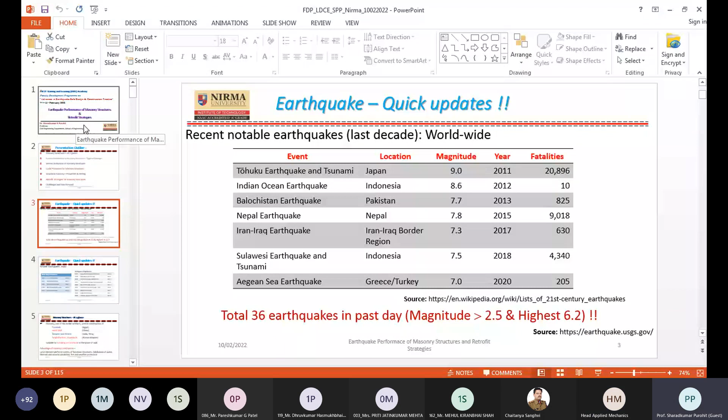Okay, press F on the keyboard, sir. Let's check whether it is without full screen mode. Also, is it changing the slide? Yes, it is changing now.

So it's going well as far as. Yes, yes, this will be fine. So if it's not in presentation mode, this will work. Okay, fine, but let me try for the last time in case. Should I start from the beginning with F5? Yes, let me try once.

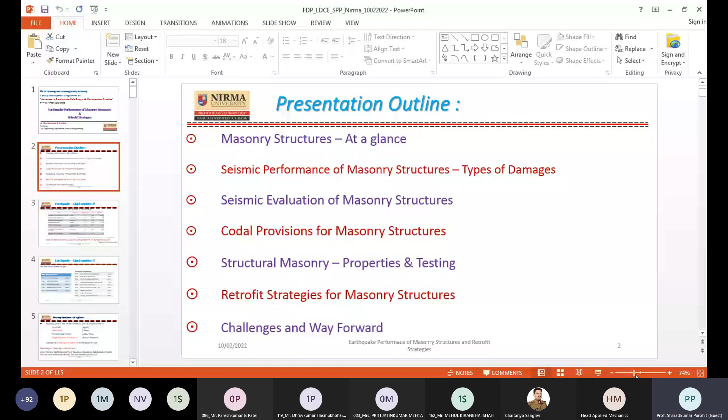Is it coming up in a full screen mode, sir? No. So I think better we go to that version only. Can I just keep it a little bit bigger? Yes, it is changing now. Let me collapse this. I think this looks pretty well. Yes, sir. Okay. I'm extremely sorry for the glitch, but I hope now the slides are moving. Yes, sir, fine. So I'm just reconnecting back. Sorry for that interruption.

So perhaps the discussion will follow in this chronological order, where we will discuss a little bit about the masonry, and then its performance during past earthquakes, then the various ways of seismic evaluation as far as masonry structures are concerned, followed by some of the codal stipulations that provide a certain amount of safety against the earthquake as a force.

And then we will cover some properties and testing required to be done for a masonry unit or masonry as a whole, as a part of one of the case studies carried out in our own department. And then some of the retrofit strategies commonly employed in our own country and worldwide, and some of the challenges and way forward.

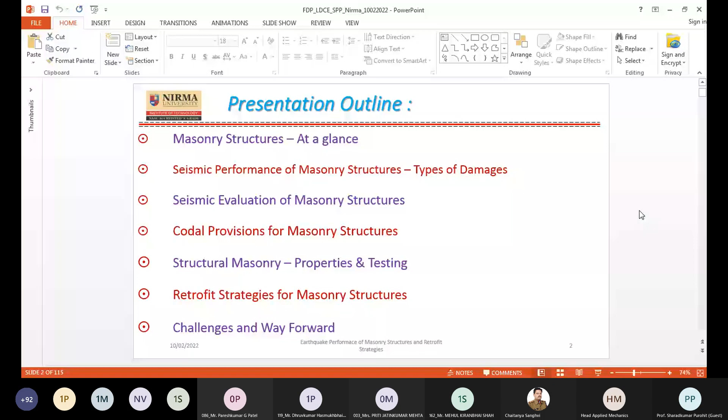Now things are going well, sir. Yes. Okay, fine.

Thank you, sir. So these are some of the notable earthquakes that I was discussing a while before. These are worldwide earthquakes that happened in the last decade, and a couple of them are more notable to us: the Nepal earthquake of 2015 and the earthquake on the Iran-Iraq border region. And the Balochistan earthquake was also of significance, despite the fatalities. It has given us a lot of lessons to learn.

And if we look at day-to-day activity, every day there are a huge number of earthquakes appearing on our Mother Earth. Yesterday there were 36 earthquakes, magnitude ranging between 2.5 to 6.2.

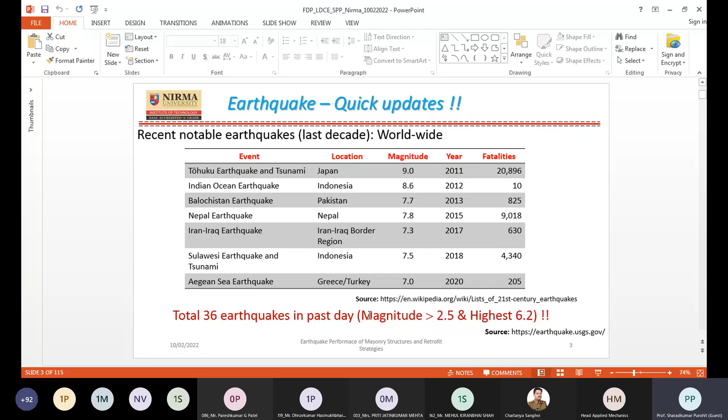Coming back to the domain specific discussion, masonry is one of the early civilization artifacts, used in the construction of stone based pyramids and the Great Wall of China. And in India and Peru, some very well-known temples and palaces were built mostly in stone masonry, and later with brick units along with lime mortar.

And in the Roman empire, amphitheaters, aqueducts and colosseums were built in stone or later with brick or other masonry units. These were possible to construct because such elements are very well suited to handling vertical loads, which are always in the plane of the wall. But for any load out of the plane, they become the most vulnerable element.

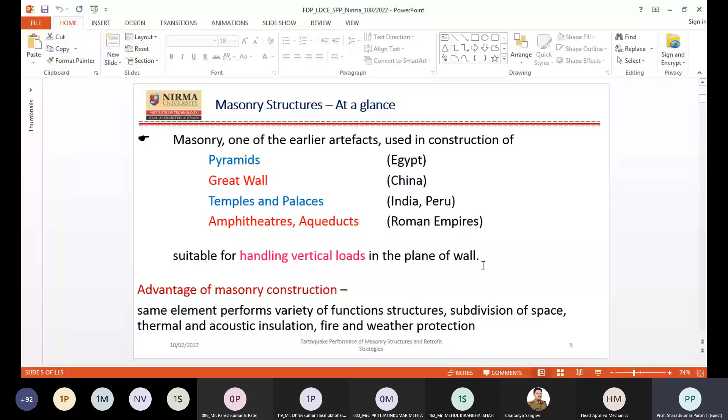But one of the major advantages of masonry is that the same element performs different functions in the same structure. It acts as a structural element, it serves functional requirements, and it gives serviceability in terms of fire, thermal and acoustic insulation, and weather protection. Perhaps that was the reason masonry was considered one of the very important elements for civil habitation in old times.

In fact, if you look at the masonry, we know the masonry is basically nothing but the assembly of the various structural units which are bonded together in a particular pattern by either mortar or grout. And there are different types of mortar and grout that we have been using, right from mud mortar to recent days cement, and now specialized grouts are also available to join the different masonry units.

But this masonry, when used in a different form, can be considered as unreinforced masonry, or when we try to give more strength to such units by placing reinforcement in the corners or at a certain interval along the length of the wall, they become converted into reinforced masonry. And certain parts of the world have also been employing pre-stressed masonry. Of course, it is not very common in our part of the country, but some western countries or some countries in European territory have been using pre-stressed masonry as well.

As we know, masonry structures are very well designed for withstanding compressive load, and they are able to do that because of the weight of the structure itself, and that's how we call them load bearing. This load bearing structure forms a very good transfer mechanism for load from horizontal to vertical direction, and they have been mostly appropriately used for buildings. And since they are stable, take load, and have a good load transfer mechanism, they have become a common building typology in rural India as well as semi-urban areas.

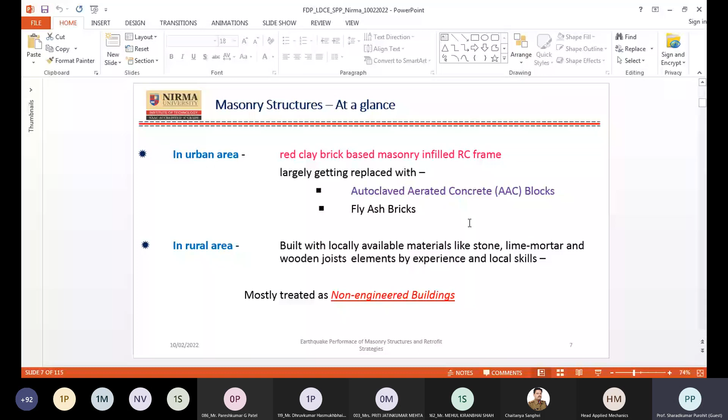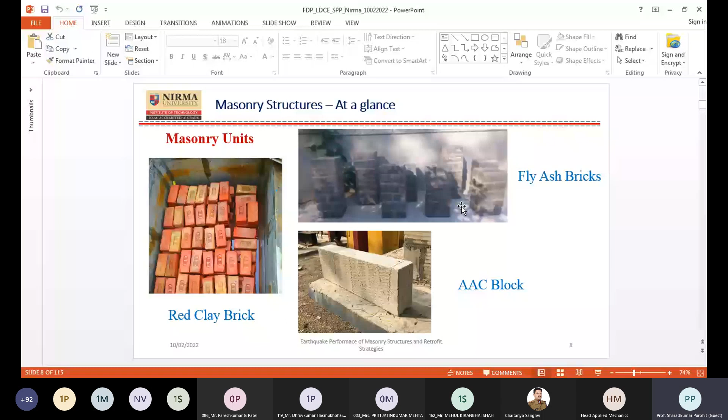Some of the masonry units that we are very much using right now include red clay brick, fly ash brick, as well as AAC blocks, which are now very widely used, and fly ash bricks are also slowly and gradually replacing red clay brick. In some other countries, different forms of masonry units are also used, like concrete blocks. Of course, this is not very common in India.

We still don't build with concrete blocks. We either use red clay brick or maybe fly ash and AAC up to a certain extent. But in other parts of the world, they have also been using hollow concrete blocks with 2 cells or multi cells, like 3 cells or even more than that. So they have been developing masonry units of different forms.

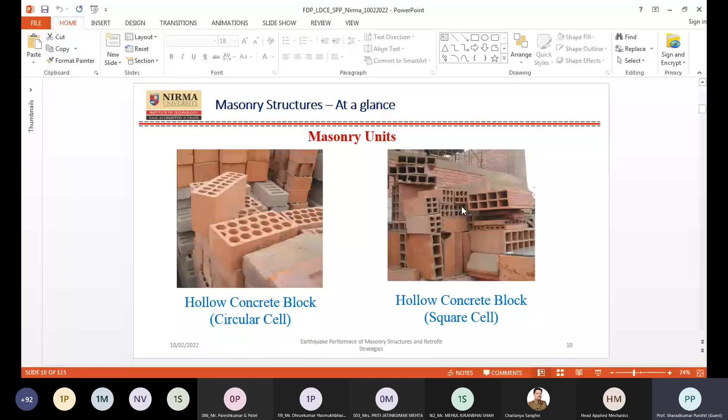There are multi-cell units also available, as you will be able to see in the next slide. There are circular cell based hollow concrete blocks, or square cell hollow concrete blocks. In some countries like Canada or New Zealand, or somewhere in the European region, you will find practices of masonry building, maybe not purely unreinforced, but with such cells where you put a reinforcing bar. So these are the various structural units or masonry units that have been used.

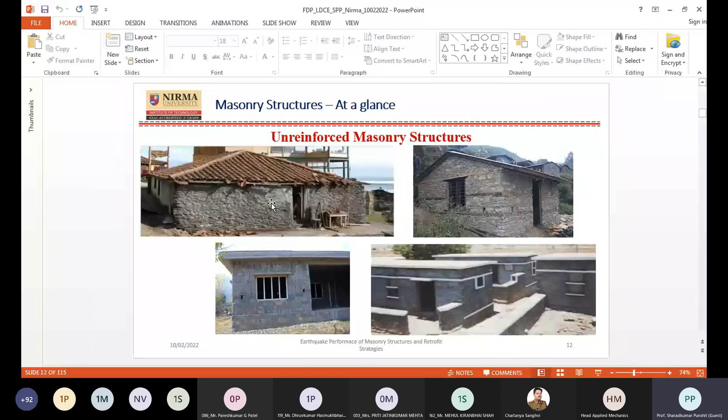You will also find a variety of stone based masonry work here. Some of them are very nicely placed, as you can see on the right hand side of the screen. But this top portion, you will see, is perhaps not very nicely built, but they have been very much part of our common human habitat.

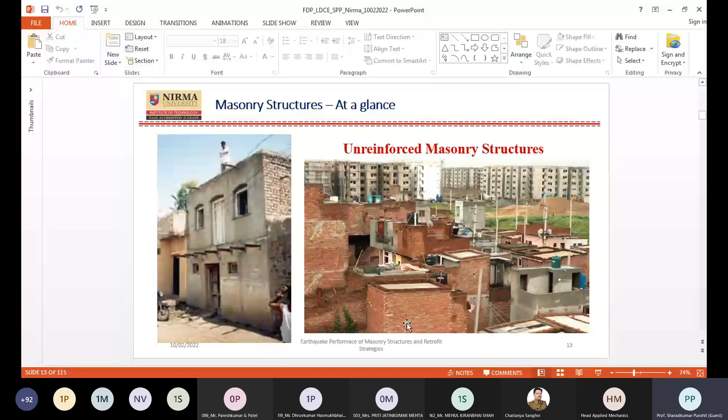But these are very haphazardly done, and somewhere you can see very long vertical red clay brick walls that have been built, and people have been living in them. Here also you will find some haphazardly built red clay brick based buildings, and somewhere you will also find the use of two different types of masonry.

I'm not sure whether you are able to see the cursor, because I cannot use my laser pointer now, but are you able to see the cursor moving? Can someone help me? Yes, sir. It is visible.

Okay, thank you. So you will find that depending upon availability and maybe some other factors, people have even started using a mix of masonry units. Perhaps it is not a very good practice, but you will find them, and different arrangements, in very simple unreinforced masonry structures in different parts of India.

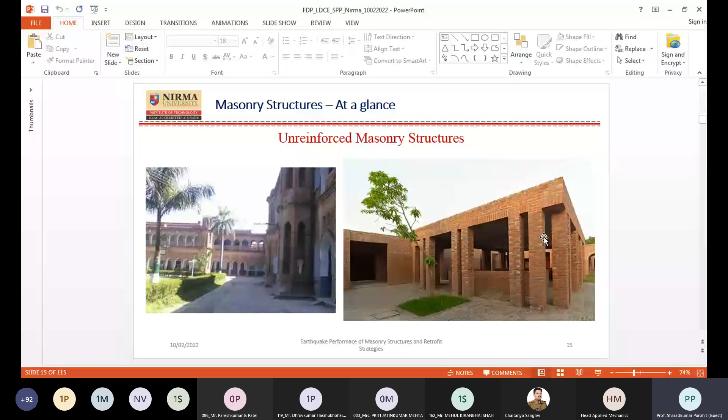Typically, for most of our reinforced concrete structures, we build the RC frame first, and later on it is infilled by masonry. But in confined masonry, the process is a little bit reversed. It means you build both of them simultaneously. So you build the masonry structure up to the height required, and along with that, you also have reinforcement going on at a regular interval. And then you cast the reinforced element a little bit later, once you have the

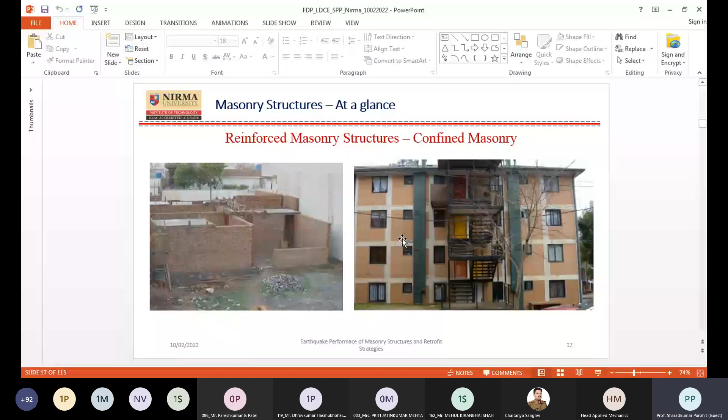Otherwise, if we look at our own philosophy of masonry structure, we typically do not have many examples where we have built masonry structures of more than 2 stories without any reinforcement. So unreinforced masonry structures are mostly limited to 2 stories, but with confined masonry, one can go up to 4 or 5 story construction. And a recent example near the city of Ahmedabad is the IIT Gandhinagar campus, which has come out of confined masonry construction, at least the hostels and some of the faculty residence buildings.

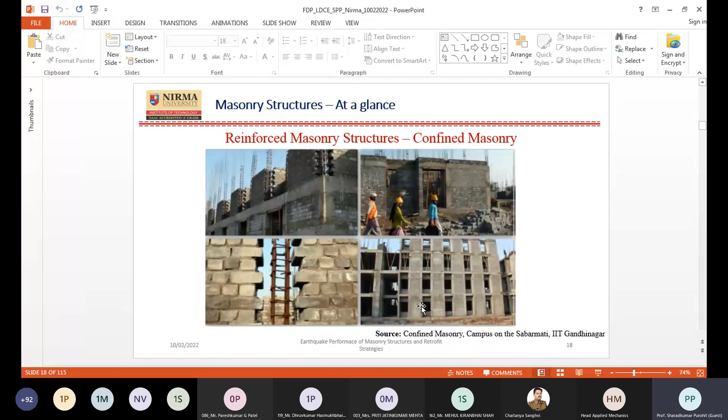Here you can see that the brick wall has already been taken up, and the IIT campus, being a green campus and GRIHA rated sustainable campus, used fly ash instead of red clay brick. In order to utilize this waste, they prepared fly ash bricks at the site and used them as the masonry unit, building in between the columns with a toothed connection to give confinement to the wall. And you can very well see 3 or 4 story buildings coming up with confined masonry. These are some of the recent practices, alongside the unreinforced masonry structures that have been built or that we still continue building.

But if we try to understand from an engineering perspective, masonry structures are typically passive structures, and therefore they heavily depend on their mass and stiffness properties. They are very good against in-plane loading, as we have just discussed, but their out-of-plane behavior is very weak, and therefore they are vulnerable to lateral load applied out of plane to certain walls. It becomes in-plane loading for certain walls, but for other walls it becomes out-of-plane loading, and that is where it becomes vulnerable.

And because of their vulnerability, in past earthquakes we have experienced worldwide, masonry structures have become vulnerable, and they have undergone damage of varied degrees, ranging from partial damage to complete collapse. If a particular structure is not very well built and does not have enough earthquake-resistant features, then it is likely to undergo complete failure. That we'll see in some of the photographs a little bit later.

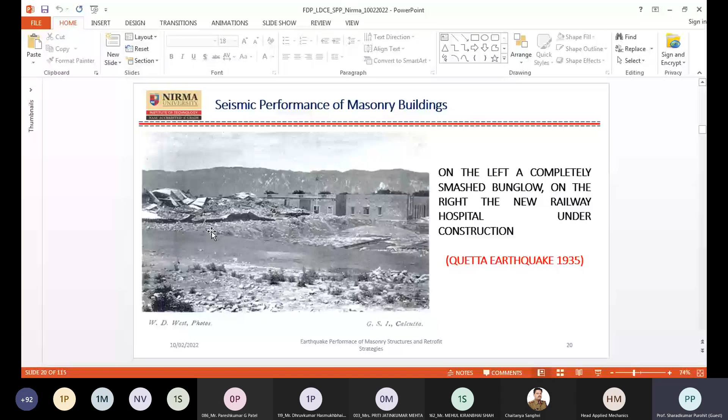But some of the structures do not undergo complete damage or completely collapse, but they show damage of varied degrees or different forms due to the mass and stiffness attributes of masonry structures. So I have tried to list some of them here in a chronological order and classification, so one can understand that most masonry structures are found to be very weak against out-of-plane bending.

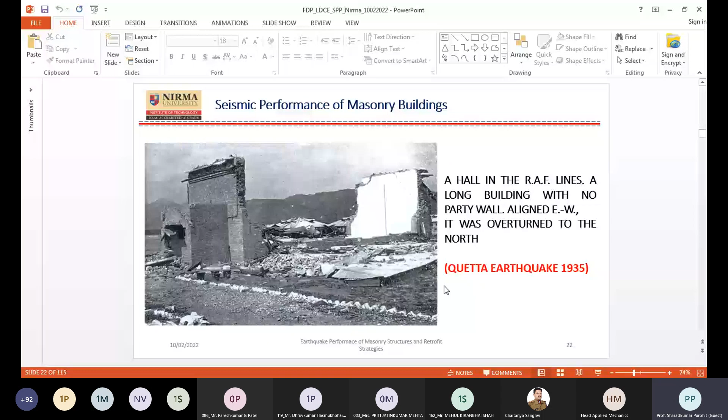A similar kind of failure you will also see in a Chile earthquake, where this long standing wall has some partial stiffening. As you can see, there are regular stiffeners in the wall, but still the in-between piers have a huge aspect ratio, and therefore it makes a perfect case of a long pier subjected to lateral load, likely to undergo out-of-plane bending, and one can see a tensile failure appearing in this particular wall. This is a very good example of an out-of-plane wall failure.

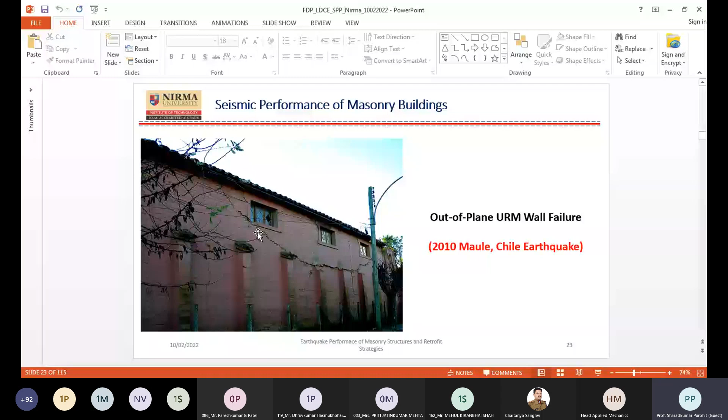We see similar experiences from the 2001 Bhuj earthquake, wherein sometimes not only the out-of-plane failure of a long wall but even a short wall may go away from the corner, because of the weak connections of the cross wall, it has completely gone from the corner of the building.

Because that corner has gone off, despite this stone structure having a continuous lintel, as you can see from the arrows I am moving, perhaps some engineers had already realized there was a requirement of a continuous lintel, but that lintel has also collapsed because the corner wall collapsed. This was a typical corner failure seen in the Bhuj earthquake and some older earthquakes as well.

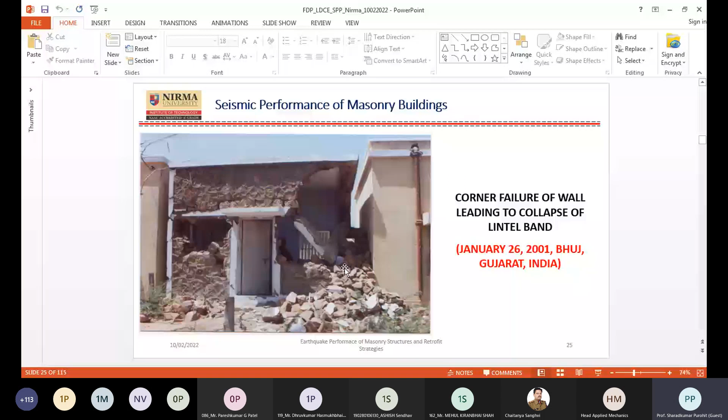Again, when the component of the earthquake gets transferred in the in-plane direction of any wall, you will find that because of the aspect ratio, some of the piers typically undergo shear deformation. For a certain aspect ratio, shear deformation becomes very predominant.

We are all well aware that any freestanding wall subjected to lateral load typically undergoes both bending deformation and shear deformation. We have found that if the aspect ratio is less than half, shear deformation becomes very predominant, and that leads to a diagonal kind of failure in a building.

Some similar pictures or similar behavior were also seen in the Bhuj 2001 earthquake, where a shallow wall with regular openings underwent first shear failure, and later you can see it completely collapsed because of the very low strength of that particular wall.

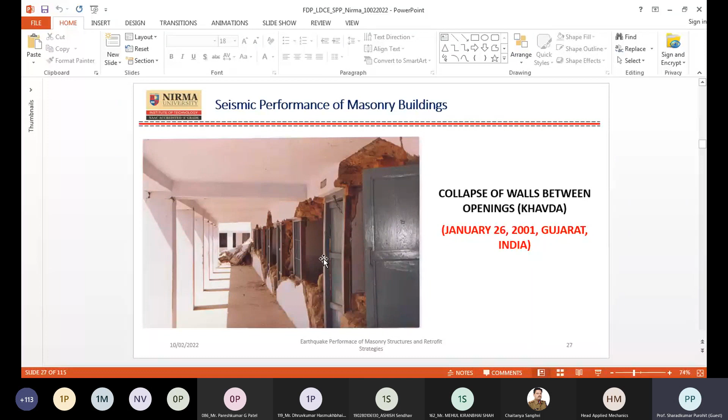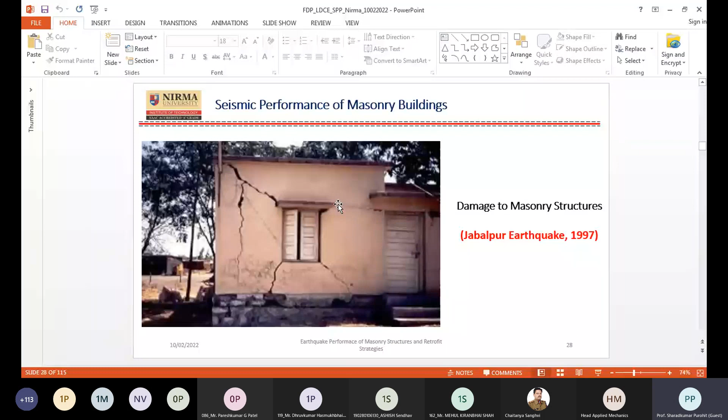Such scenes were very common during the 2001 Bhuj earthquake, and before that in the Jabalpur earthquake too, we found that despite having a good aspect ratio of the wall, close to the opening there would be diagonal cracks at the top and bottom of the opening because of shear. Such a sight is very common.

When this aspect ratio becomes a little higher compared to the previous one, as seen here, there is a larger aspect ratio, with some beam going on, and some height or distance available in the building. This acts like a fixed end connection for a frame with a larger aspect ratio.

Here you can see complete wall flexure happening, where tension appears on the bottom side of the wall, and because of that some masonry or plaster work has already gone, with cracks running right from the tension to the compression zone.

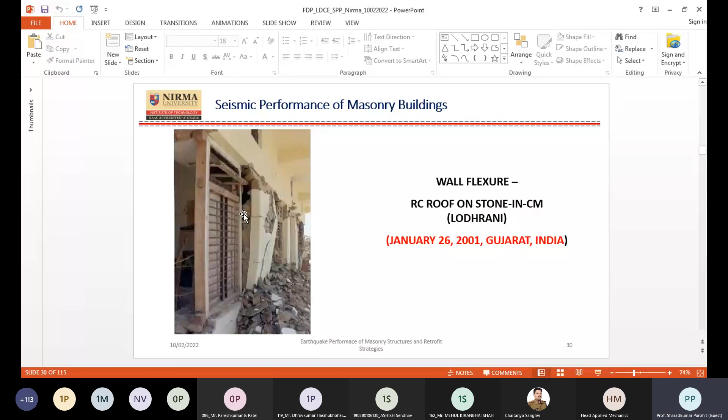So it is very typical of a flexural failure, even in the case of reinforced concrete flexural elements. You can see that the tensile cracks grow from the tension side and penetrate fully up to the compression zone.

If you look at all the damage in one go, as summarized in the book of Tomazevic, you will find that all those piers under an earthquake, when subjected to in-plane loading, will undergo a shear failure, as you can see.

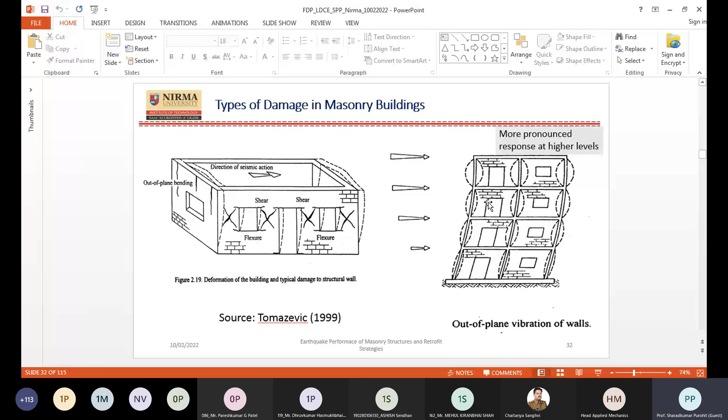So any multi-degree of freedom system with a lower mode of vibration always shows higher participation from the top stories, or the top couple of stories, depending upon the mode. This is what people have already summarized, and based on some studies we have done, we have summarized some of the damage patterns typically observed during an earthquake.

So they are typically an out of plane collapse of exterior wall or any interior wall as well, failure of the wall corners, and cracks at the wall intersection. That can be another common type of damage pattern that we see.

There can be diagonal cracks in the structural walls, predominantly when the in-plane wall is undergoing shear failure. Then you will find diagonal cracks in the wall, or when the aspect ratio is a little higher, because of the lateral loading the wall can undergo wall flexure, and they will also lead to cracks in the spandrel beams and or parapets available towards the exterior wall.

And there can be partial disintegration or collapse of the structural wall, and last but not least, either partial or complete collapse of the building. So these are some of the sites, observations, and past earthquake learnings that we have tried to summarize.

Most of the time, irrespective of various events that have happened over a period of time or over an interval of time, the masonry structures will more or less behave, or they will be subjected to failure, in any one of the ways listed over here.

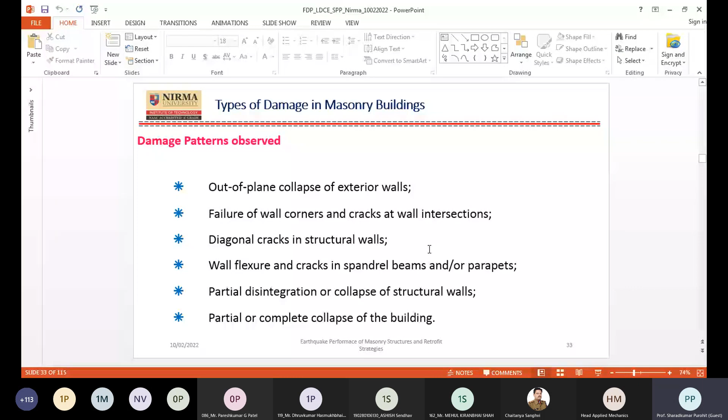Nowadays there is a recent practice, as we find out somewhere, that certain buildings put up precautionary measures, or put some wall stamping, and write something like this, as some of the buildings in California and some of the URM buildings in Portland have already been mentioned: it is an earthquake warning. This is an unreinforced masonry building. You may not be safe inside or near an unreinforced masonry building during an earthquake.

Perhaps this may be a little bit of a new addition into the practices when you build a URM. But that also gives the idea that people still do not want to discontinue making and constructing URM buildings. So there has been some affection, some utilization of the URM, but now they are also putting an earthquake warning, as some of the examples I have shown here.

So these are some of the experiences that we built, and when we start looking at some of the damages, perhaps we try to understand that, and we try to build some engineering about it, and that allows us to now typically take up a seismic assessment or seismic evaluation of the masonry building.

So typically, the seismic evaluation is nothing but understanding how that building behaved, what was the attribute of the building, what was the load transfer mechanism, what kind of damages it has undergone, and based on that, we try to figure out whether this building has lost its integrity to a varied degree of levels.

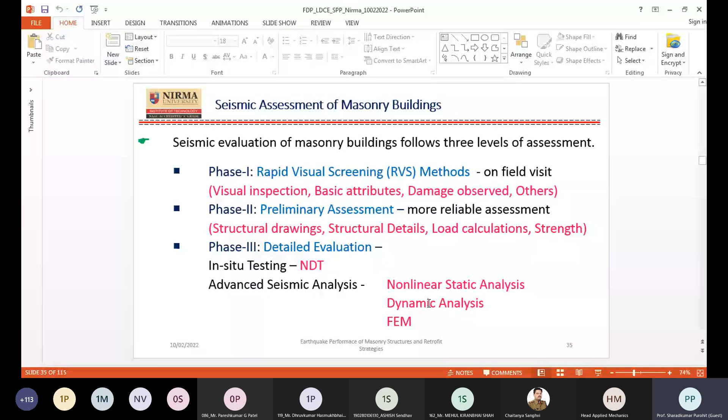And as I said, when it comes to a detailed evaluation, mostly we do it in a two-way, and out of this in situ testing is playing a very important part. And perhaps as a country, we might not be still capable enough to conduct this kind of testing, or because of the limited skill set available, or because of the limited people involved in such kind of thing, there is always a dearth of input properties or input data as far as this detailed evaluation is concerned. And of course, we have been struggling all the way, right from employing the right kind of entity, getting the required input data, and then carrying out the detailed evaluation in terms of the analysis.

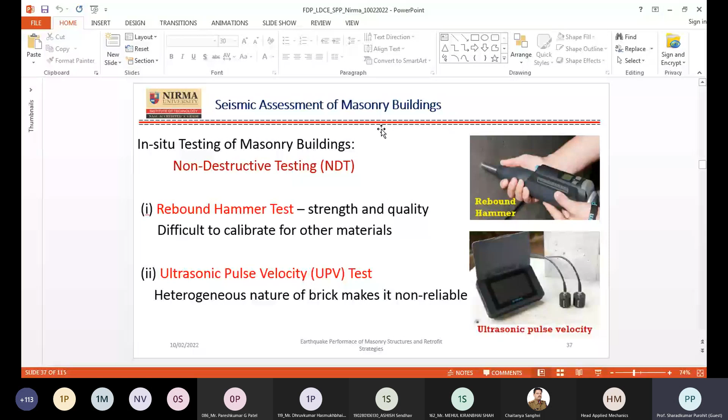And now people are also doing radiography to detect the reinforcing steel or bed joint reinforcing steel, whether they are in the wall or not, masonry ties or anchors, pipes, conduits, anything that we want to figure out. Of course, this set of instruments is a little bit costly, but they have been developed by some of the developed countries, and they are available. Costly, but somehow they are available.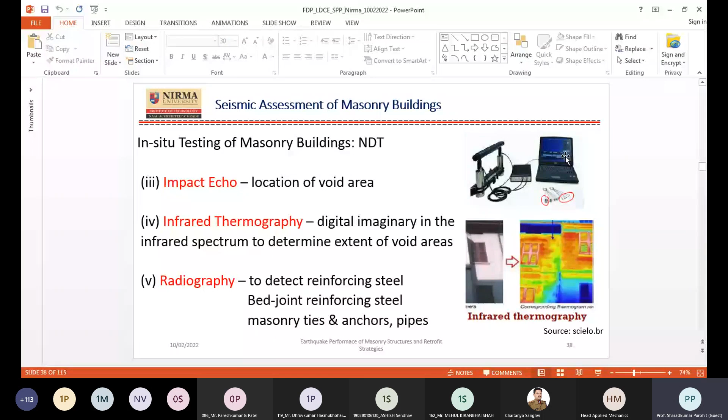But the most common type of test is not part of non-destructive testing for masonry structures. Over a period of time, people have realized that carrying out NDT for masonry structures is not a very viable solution, or not feasible all the time, and therefore some semi-destructive testing is required. One of them is called the flat jack test, following ASTM C1196, and this is typically used to calculate the in situ compressive strength and the stiffness of the masonry, where you have to open a bed joint at two different levels and place the flat jack.

They are available in different shapes, either rectangular or semicircular, to adjust to different forms of masonry. You need to open out a bed joint, insert it, and then pressurize it to give the prescribed load, and in between these two you place your LVDTs or mechanical dial gauges, both in vertical and horizontal directions, to figure out the strain produced in that particular element. You can develop a stress-strain relationship, calculate at what load what strain is happening, and also calculate the compressive strength of the existing structure. So this is a very well established, very common test, and there are certain organizations in India who have been doing such testing very regularly.

Just to share with you, one is CSIR SERC, and another one is the CSIR lab at Roorkee, which is CBRI. Both of them have such facilities available, and they have been doing such flat jack tests. Of course, they may not be within reach of stakeholders in other parts of the country, but at least some organizations have it. Some of the IITs also have such testing facilities available, typically IIT Kanpur, IIT Guwahati nowadays, and IIT Madras.

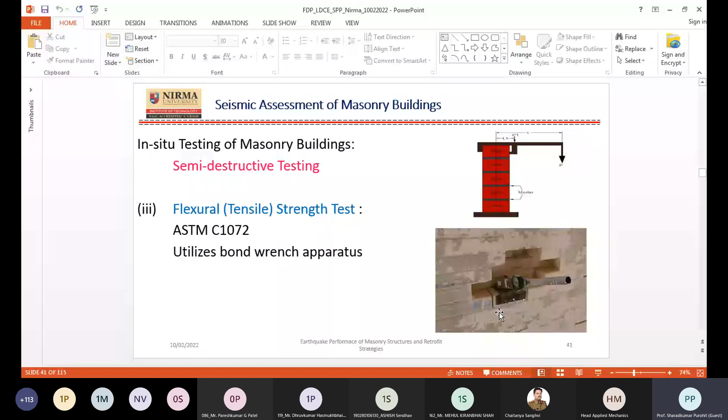Of course, I have avoided the advanced seismic analysis as part of detailed evaluation, because most of you might be well aware of it once we have input from such basic tests: the shear strength, the compressive strength of the masonry, and the third very important parameter, which is always difficult to get and varies hugely across various parts of our country, the modulus of elasticity.

So establishing the modulus of elasticity and its relation with the modulus of rigidity is, of course, sometimes a challenge, as we have learned from our own experience when we try to get it in our own laboratory. We find some of the challenges, but as you are very well aware, the modulus of rigidity is around 30 to 40% of the modulus of elasticity. But getting that also is very important.

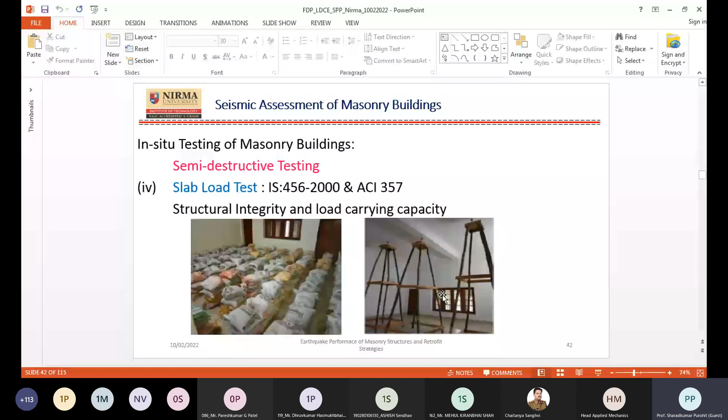I have intentionally avoided some of the mathematical equations, so that we can convey the basic fundamental understanding about this masonry structure. But anyway, once we know these basic properties, the mathematics can be very well developed. There are very good references available in terms of books and literature which talk about how to use that mathematically. But these are some of the basic pieces of information and some important experimental testing, either at in situ level or at laboratory level, that we have to carry out.

And once we are done with this, at least we can try to better understand the seismic response of the masonry structure. As we are very well aware, any masonry structure has typical components in terms of the roof, walls and the foundation, and the loads coming in vertical and horizontal directions are transferred from roof to the wall and wall to the foundation. Therefore, under a horizontal force, certain walls will act under in-plane loading, and some of the walls will be subjected to out-of-plane loading.

And the major problem we face in masonry structures is that they have a very good in-plane loading capacity, but they are very weak in the perpendicular direction of the wall. When earthquake or lateral force is applied perpendicular to the plane of the wall, it is likely to undergo overtoppling. If it is a freely standing wall, it is obviously undergoing toppling. But if it has different boundary conditions, like fixity at both top and bottom, it will undergo bending or flexure, and because of the weak tensile strength, it will immediately break into two pieces in the out-of-plane direction.

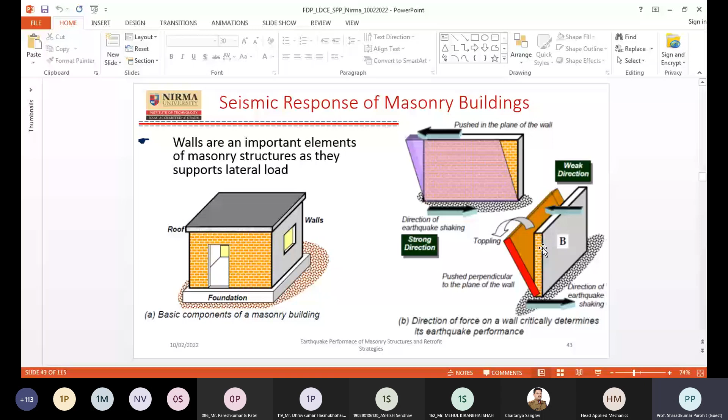And if we talk about any masonry building, and take different walls like A and B, if they are not very well connected by cross walls, then in the event of an earthquake, the walls perpendicular to the earthquake loading will likely overtopple. Therefore, in order to get better resistance from any masonry building, we have to have a box type of action, or a unified action, in terms of the cross wall supporting the perpendicular wall. So we have to ensure, in whatever masonry structure, that if your cross wall is supporting this perpendicular wall nicely, their behavior may be much better.

And of course, we have seen in some pictures in the earlier part of the presentation that even if you have a cross wall, but there is no proper connection between these walls, then the wall perpendicular to the direction of the lateral load will either overtopple or overturn from its place. Therefore we must have very good bonding between both perpendicular walls whenever there is an earthquake. And of course the aspect ratio also plays a very important role.

So even if we have a cross wall available, if we have a very long wall, then despite the good support from the cross wall, it is likely to undergo bending. So we have to make sure that masonry structures have a better aspect ratio. And as we can see, for a short wall, the cross wall is very well supporting the wall which has a lesser aspect ratio.

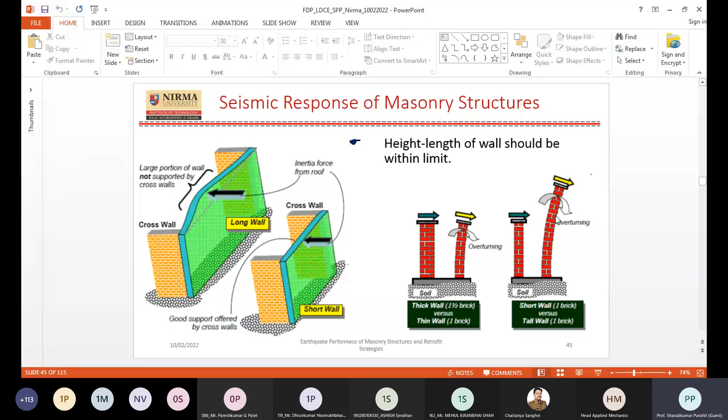And why we are talking about this a lot: typically we found by our own experience, and as reported by many other technical references, that most of the time the fundamental period of the masonry structure is around 0.3 second or even less for low to medium rise buildings, because of the presence of many structural walls. And because of these many structural walls, the structure becomes stiff, and a stiff structure always attracts larger acceleration, and because of this larger acceleration it is likely to undergo more damage.

And therefore, because the time period of such masonry structures is very low and it becomes almost an acceleration sensitive structure, you will find even a moderate earthquake can cause a lot of damage to the masonry structure. And therefore masonry structures become a little bit vulnerable against different varieties of earthquakes. As you are well aware, a large earthquake has a huge frequency content, and therefore it will likely affect the vast majority of structural typologies.

But even a moderate earthquake can cause a failure or damage to the masonry structure, because low to medium rise buildings are always considered stiff structures. And therefore, in order to avoid such failure in a moderate earthquake, or even a very frequent earthquake with lower magnitude, we have to have our masonry structures very well built with certain earthquake resistant features.

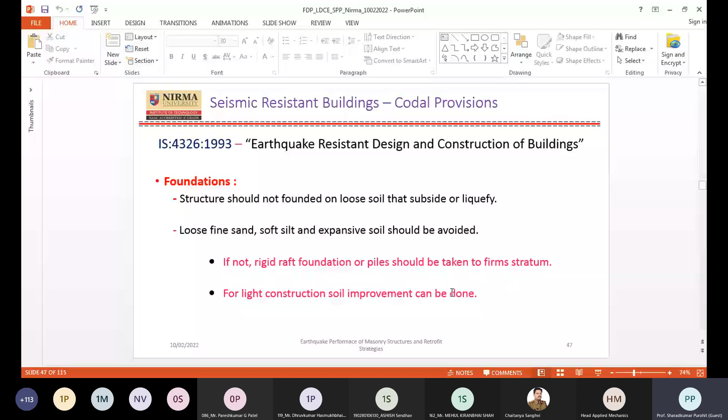Otherwise, there will be failure of the structure as a whole, and therefore most of the time we make sure that the foundation is not founded on loose soil which can subside or liquefy. And therefore we have a lot of ground improvement techniques, and there is geotechnical earthquake engineering that takes care of such things. But as far as structural engineering is concerned, we need to ensure the separation of adjoining structures.

So we have to categorize our building depending upon the importance factor as defined by IS 4326. For different seismic zones, we have different categories of building, and different requirements have been placed to make sure there is enough separation for adjoining structures. So here we need to realize that structures with different total height or story height and different dynamic characteristics need to be separated, and this is done to save our structures from the pounding effect, because two dynamically different structures are likely to undergo different modes of vibration.

You are well aware from the concept of dynamics that different dynamic characteristics under the same frequency are likely to excite different vibration modes. When you draw the mode shape of a particular building, you may find that one building is vibrating in the first or second mode while another is vibrating in a higher mode, and there may be a collision between these two structures.

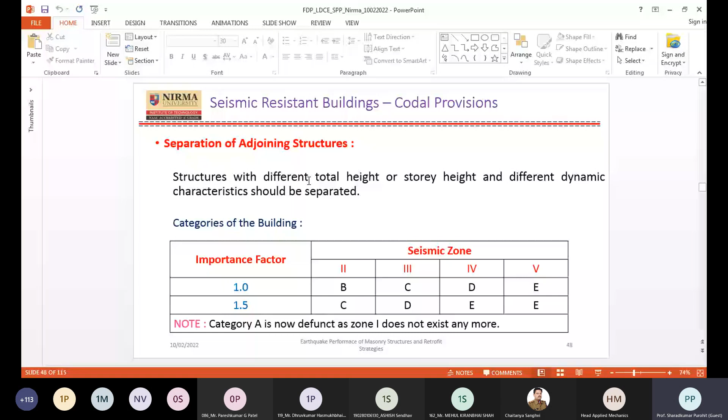Therefore we need to have some separation of the adjoining structures, because unreinforced masonry structures are typically constructed in our country very haphazardly, and therefore this particular provision makes a lot of sense.

As far as ensuring good cross wall connections, IS 4326 talks about a toothed joint. Of course there are some difficulties observed during construction of such a joint. In fact, feedback received during confined masonry construction shows that this toothed joint is really a little difficult to maintain quality for, as far as construction is concerned, but it is a very important element to stitch the walls together.

Therefore we need to provide some kind of alternate toothed connection as detailed in IS 4326 for different cross walls. You can see that whenever two end walls are meeting, there is a different kind of toothed connection, and when an internal wall meets a long wall, there is a different kind of connection. So there is different detailing given for masonry walls in IS 4326.

Apart from that, there are certain restrictions on providing openings so that enough piers with good shear resistance can be formed. IS 4326 has given certain dimensions or restrictions on openings for masonry structures, outlined in table number 4 with notations given on the left side of the figure, ensuring that the wall has enough piers available between openings.

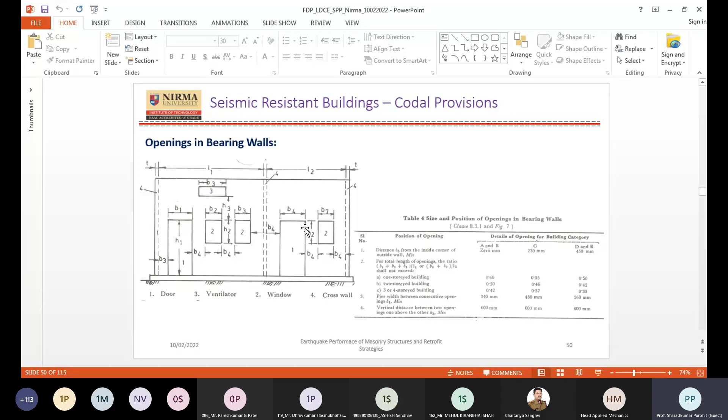This is very difficult to do. I myself do not have confidence in doing this even if I had to practice it, because this is a very small toothed connection adjoining to the opening.

Instead, many other country codes allow you to put reinforcement on all four sides of the opening to make sure there will be no shear cracks propagating from the sharp corners of the opening. IS 4326 still advocates some toothed connection to be used along with corner reinforcement, but it is a little difficult to practice in the real field.

But this is what the stipulations or features that IS 4326 has given. Apart from that, there is a requirement of seismic strengthening arrangements for category D and E buildings. Mostly D and E type buildings are located in highly seismic regions and are mostly non-engineered buildings, so there have to be certain features that are mandatory as far as IS 4326 is concerned.

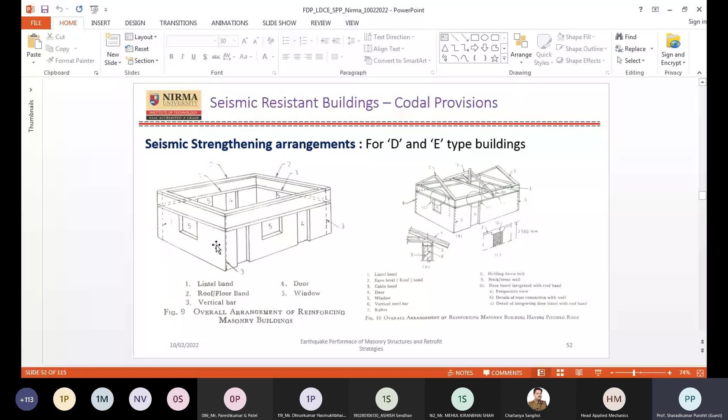But the RC band details are also provided here. I'm not going into much detail of all those categories of the building and what kind of the requirement, I think we can very well understand from it.

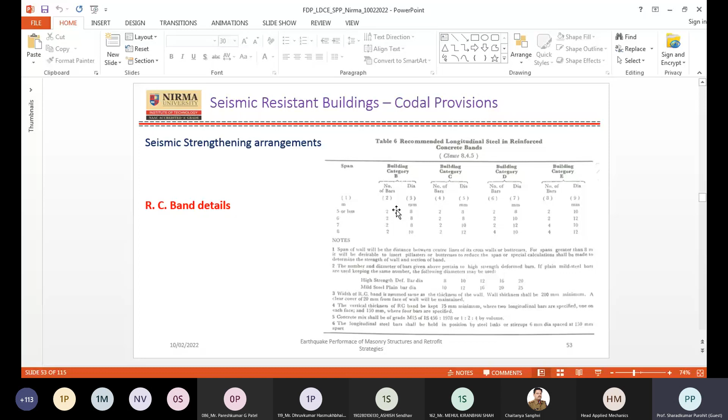But different kinds of geometry and cross-sectional walls have different kinds of detailing as far as RC bands are concerned.

So these are some of the corner reinforcements that we have to practice in order to save the corner crushing of the walls or opening of the walls, as mentioned here.

And some kind of lateral ties that we have to use with a different depth of this band. There may be a 75 band or 150 band. They have different detailings that are also given in IS 4326.

Typically nowadays, at least to share with you, I have seen some of the good practices where people are doing such kinds of things when they build a masonry structure, which is a good part of it.

But the most important yet not very well used feature of IS 4326 is vertical reinforcement detail. IS 4326 of 1993 has also outlined the use of vertical reinforcement, maybe because some other countries have a common practice of using this, since they use hollow concrete blocks.

But in our own part of the country, we never use such kind of hollow block, and therefore we do not use vertical reinforcement.

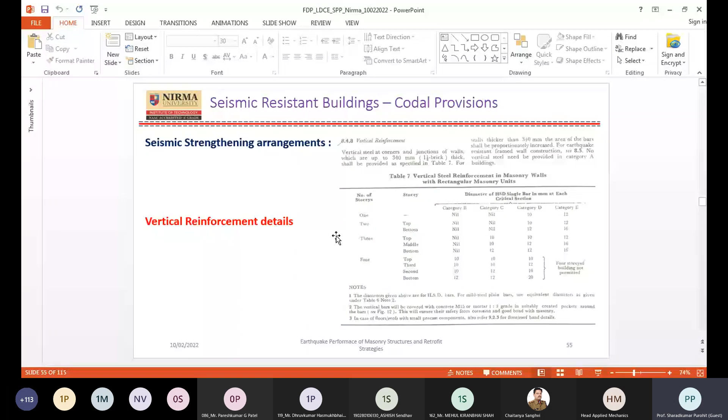But IS 4326 has outlined the use of vertical reinforcement, and this vertical reinforcement for different thicknesses of the brick walls needs to be placed in a vertical direction with a pocket, and that needs to be grouted with a cement based mortar grout.

So they have given different grades of mortar grouts. They have given different reinforcement diameters to be used for different thicknesses of the wall and different locations across the different types of bond.

So as you can see, with a small thickness, they are mostly close to the corner at the cross junction of the wall. But when you have a thick wall, they will almost reach the center of that particular wall, and from there you have to pass on a vertical reinforcement and grout it.

So these are some of the provisions of IS 4326 which are still very easy and commonly required to be employed.

And they are definitely not very difficult, because in some of the building models that we have developed here, we have used such kinds of vertical reinforcement, and it's been really easy, not that difficult.

But there is another code, IS 13828, which is about improving the earthquake resistance of low strength masonry buildings. This code talks about and emphasizes more on the shear type behavior for a masonry structure.

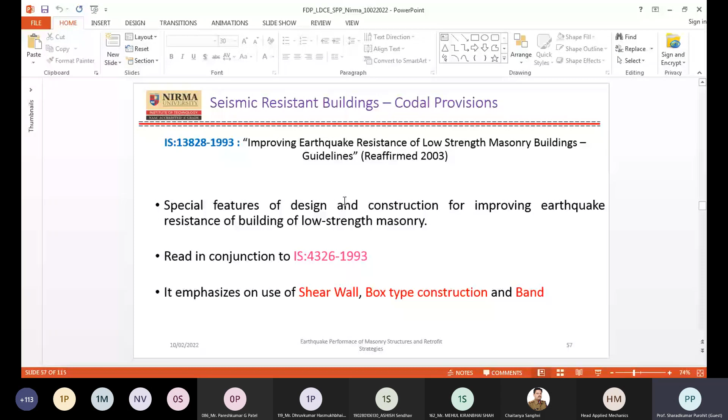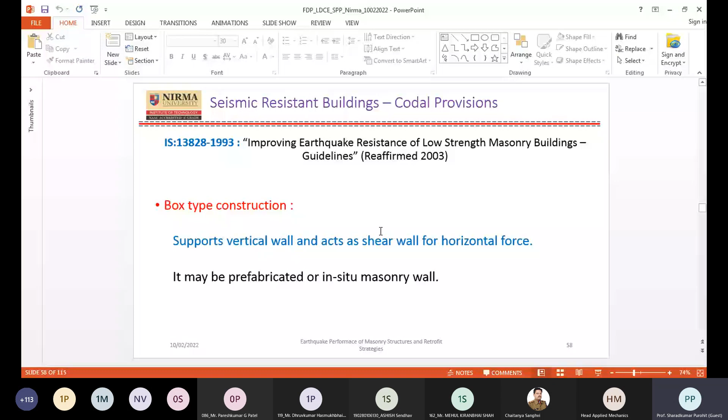But as I earlier showed in some of the photographs, any masonry structure will behave nicely if it acts as a box type construction. This is very much important for stone masonry elements.

Because in stone masonry, made from random rubble stones, under lateral load they are likely to go away from their position. In order to hold them, as given in the codal provision, you have to have a through stone.

It means a stone which has almost a width equal to the thickness of the wall, which holds and divides this entire wall into a number of small walls with different heights.

So if this is the elevation, without a through stone the total vertical height may be 1.2 meters. But because of the use of the through stone, the vertical height is limited to only 600 mm, and therefore it will improve the shear strength of that particular wall significantly.

So such kind of detailing was already given in IS 13828, 1993.

We do not have very good manuals and other documents available in our country, but there were a few references for seismic retrofitting of masonry buildings made available after the 1993 Latur earthquake. Some government agencies and private stakeholders became instrumental in giving earthquake resistant guidelines for masonry or low strength masonry structures. This is one of them, coming from the government, though of course not the only one.

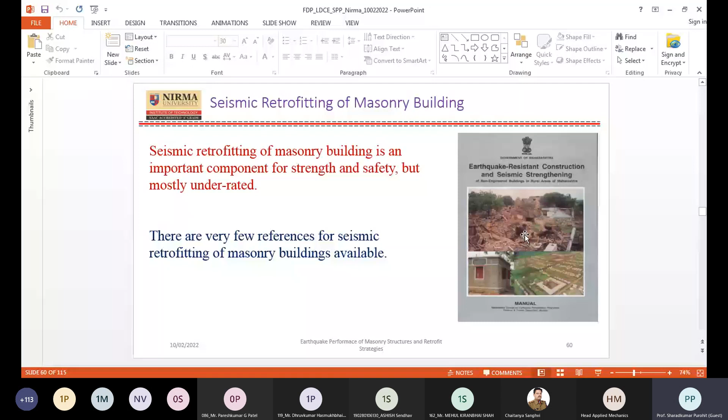If we look at seismic retrofitting of masonry buildings, one of the most basic ways is the use of a seismic band. This band may be either a reinforced concrete beam with reinforcement, or a timber band. In hilly regions, or where wood is still locally available, you can create bands in timber, or you can have a band in reinforced concrete.

Timber provides an opportunity to place the band at various levels across the height of the wall, at sill level or even below. But a reinforced concrete band does not allow such flexibility. Therefore, in old construction, or in hilly regions like Jammu and Kashmir, you find this typical feature of using timber bands at various levels across the building height. This is a very simple and effective way of doing retrofitting.

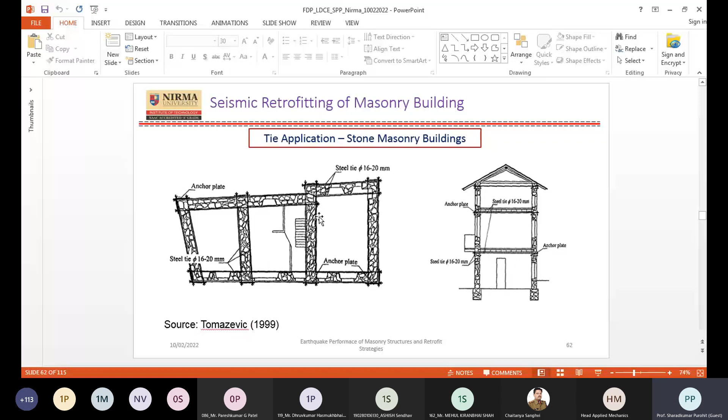Another important retrofitting method, typically well suited to stone masonry buildings, is tie application. You tie the walls with reinforcement, running throughout the length of the wall, creating a bond, and holding the walls together to form a box type structure.

In more recent applications, post-tensioning has been done. I have not personally seen this in India, but such applications are in practice in some European countries, New Zealand, and maybe Canada for certain structures. They use different kinds of pre-stressing anchors coming outside the wall, pre-stress it, apply load through a jack, and hold together long walls of masonry structures, some of them major heritage structures.

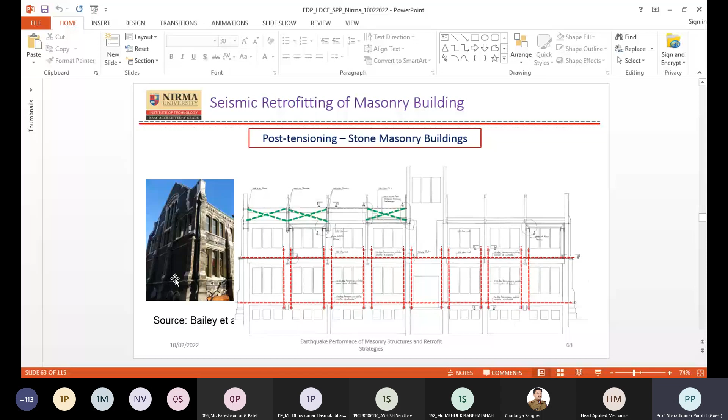You can see photographs where people have used anchor bars along the length of the building as well as across its height, as shown in this picture. But this post-tensioning is not a very common sight in our own country.

Shotcreting application is common in our own country and in countries like the USA and UK, where big heritage structures with long-standing walls are first fitted with a reinforcement mesh, and then shotcreting is done. This is a photograph after an earthquake in a California city.

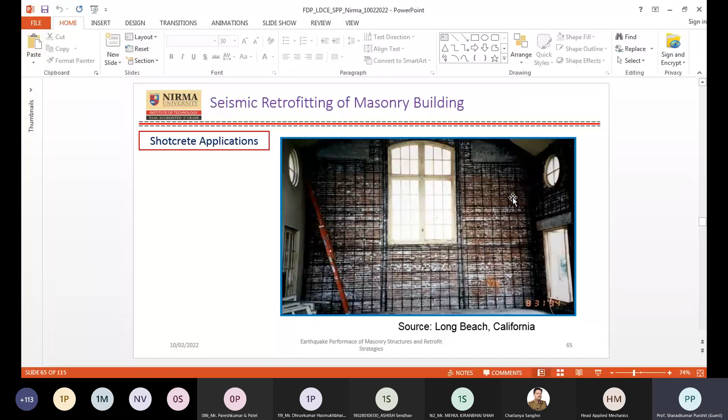California sits on the Ring of Fire. After the famous Long Beach earthquake in California, shotcreting applications were done for masonry structures. This shotcreting methodology is also very common in New Zealand. Some of these pictures are taken from the USA, showing shotcreting applications.

After doing shotcreting, the thickness of the wall increases. As you can see in this picture, inside is the masonry wall, and outside is the shotcreting that people have applied. This is again a technique typically used in certain parts of the world.

It is called overlays. Typically, one of the effective seismic retrofitting strategies for very long walls is providing an overlay. Overlays are nothing but a different type of anchors in a different pattern. They break the unsupported length of the wall, and they are typically done using reinforcing steel with a shear connector. As you can see, it is a sheet type of reinforcement placed by taking out some of the brick units along the length of the wall, then putting the reinforcement, and then grouting it afterward.

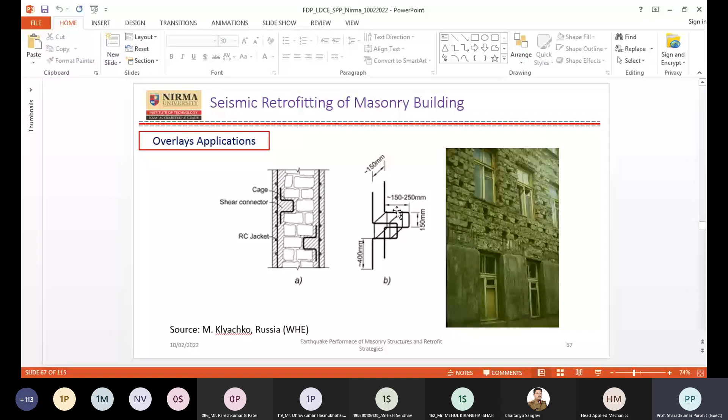The depth of such overlays varies from as low as 150 mm up to a maximum of 250 mm. Of course, depending upon the thickness of the wall, you can have a different type of overlay application. Again, this is not very common in our own country, but they are commonly used in other countries.

However, nowadays there is an increase in solutions in terms of FRP overlays. People are using FRP, CFRP, and GFRP sheets in order to retrofit masonry. Of course, they have their own issues and challenges because CFRP and GFRP sheets undergo a brittle failure. So there are certain issues, but people are using it.

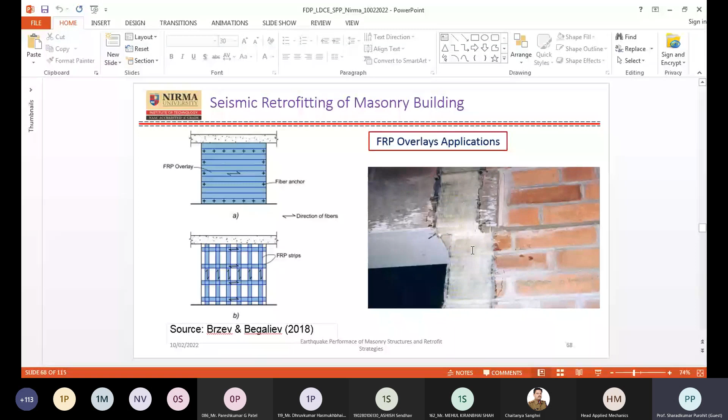Some of the other retrofitting strategies we have tried to work out with the guidance of Professor K.S. Jagadish of IISc Bangalore I will quickly cover, and I will try to finish as quickly as possible, as I know you have another session. In the last part, we have done some work on masonry structures using a semi-sophisticated but unique facility available at our own university called a shock table. Typically, after retrofitting, you can understand the dynamic behavior, or find out how much improvement happened, on a shake table.

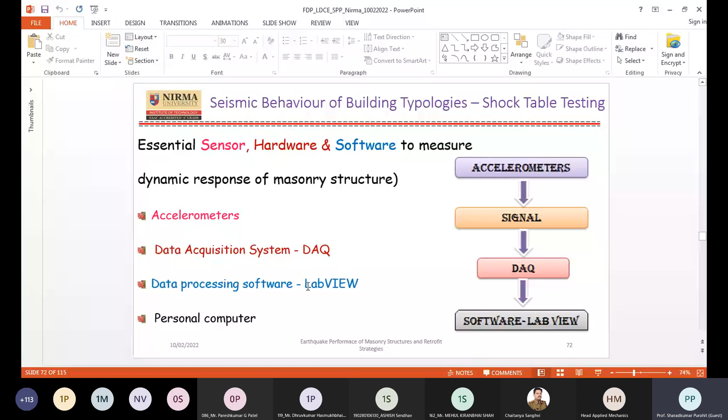I'm just running over it because of the paucity of time, but some of you are very well aware: we are using accelerometers, a data acquisition system from NI, LabVIEW software, and a computer system in order to measure the dynamic behavior in terms of vibration signals.

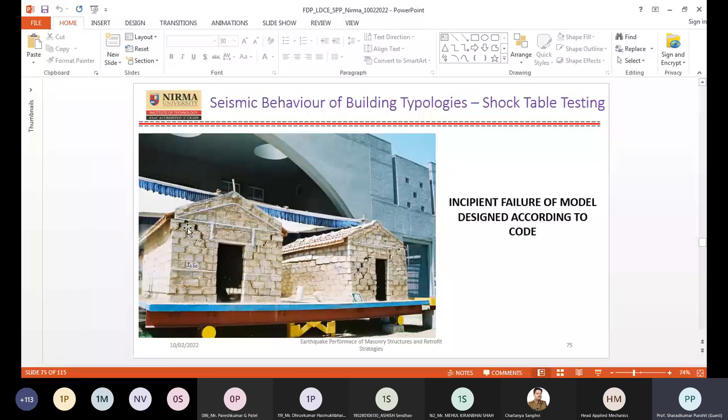In the other model, you can see out-of-plane bending of the long wall and shear cracking in the wall, but here you can see it is intact, or just at the beginning of failure, for the model where the retrofitting strategies as per 4326 are followed. And after certain shocks, the building without the retrofitting measures as per codal provisions has completely collapsed, while the other building with features as per 4326 has survived.

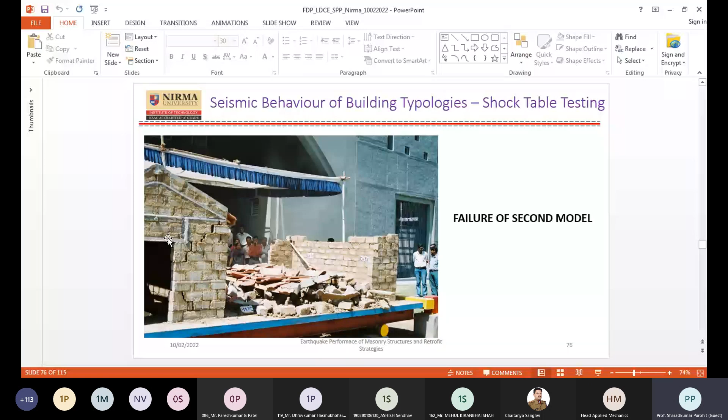You can see some shear failure that has happened in the building with earthquake-resistant features, but it still holds its shape and is taking certain load. And then we tried to look at the effect of various bands.

As I told, we have used certain bands other than what is provided in IS 4326. So this is as per 4326. This model on the right hand side is as per 4326, so it means roof band and the lintel band. But we have also provided, in the other building, other seismic bands below the sill level: below the lintel level, at the intermediate level of the opening, below the opening, that is at sill level, and below

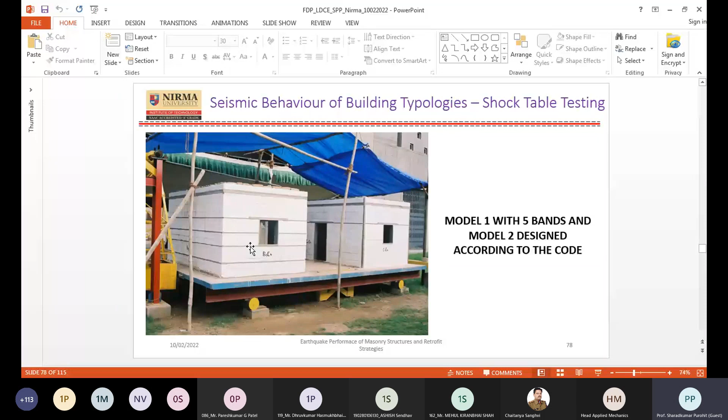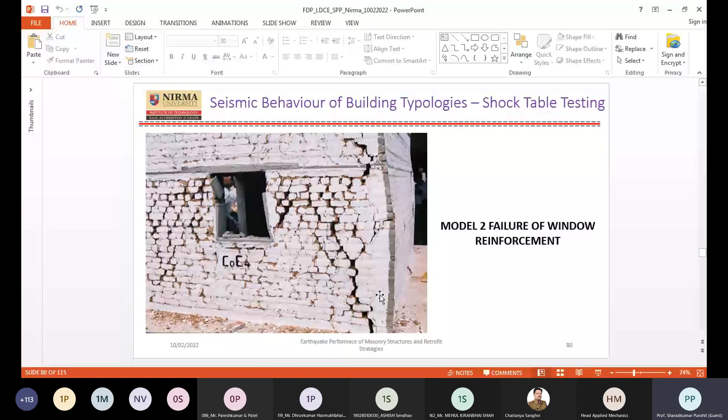sill level. And obviously you will be able to see that the building with more bands has reduced the effective length of the vertical wall, and therefore it has survived better as compared to the other model. And you can see it has not completely collapsed. The other model has shown a complete disintegration from the corner, but not the one with the band. After certain shocks, the one following IS 4326 has collapsed, but the one with the sill level band and bands other than the sill level band has improved its capacity.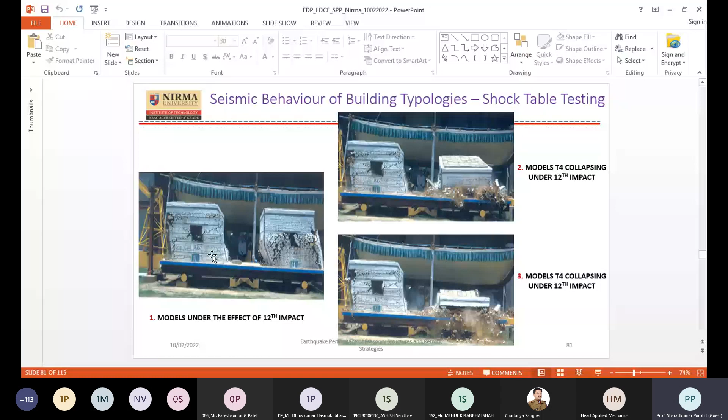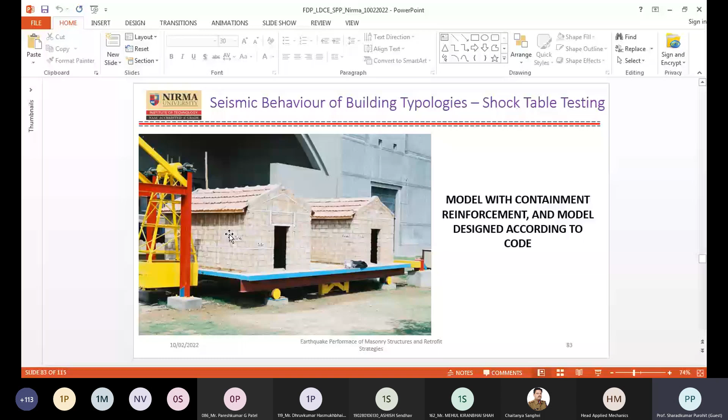And then we have brought it down with our own hands because we wanted to see how it would be brought down, so it has not been brought down because of the testing, but because of our intervention. Similarly, some other models have also been tested, which I am just moving across, but here we have tried containment reinforcement. One of the models is as per IS 4326, and in the other model we have used containment reinforcement using aluminum wire or GI wire. These are typically GI wires put in the vertical direction to avoid the out-of-plane bending of the model, and we have seen that it has worked very well.

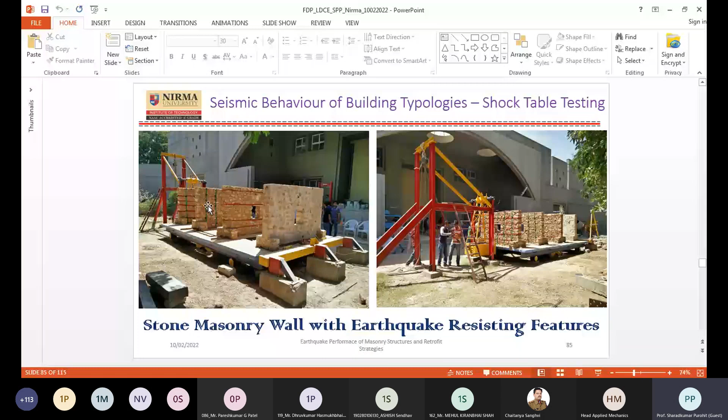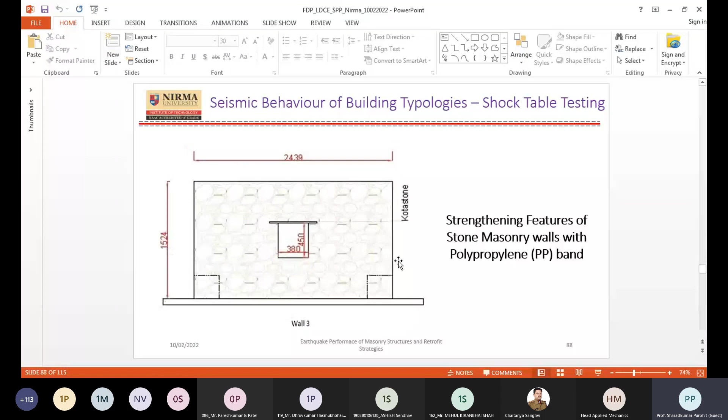After that we have also tried to model and test with some postgraduate students. We have tested the freestanding wall with different features like horizontal GI reinforcement, vertical GI reinforcement, and both horizontal and vertical GI reinforcement, and obviously the last model has worked very well. Later on we have also tried it with a PP band, and such PP band based experiments were also done with stone masonry, which has really worked very well. These are some of the outputs.

But the containment reinforcement is an outcome of Professor K.S. Jagadish, who has given the idea that once you put containment reinforcement on the outer side of the wall, it improves the bending capacity. Any wall under bending, if there is no reinforcement, cracks from the tension side. If you put a reinforced concrete element, the cover concrete will start cracking because of tensile stress. But when you have a masonry wall connected with containment reinforcement, it will really help to take care of the bending very well.

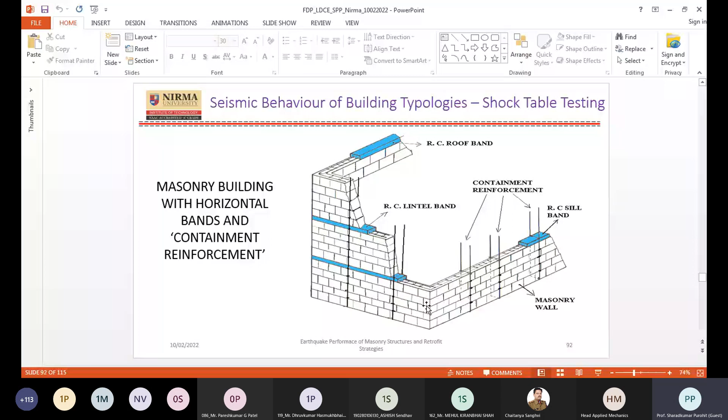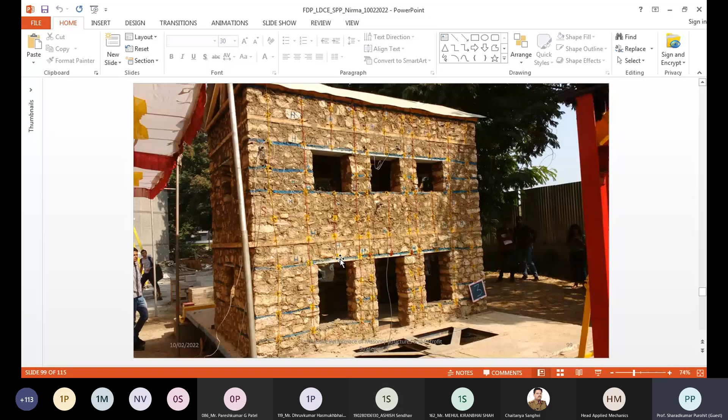And these are the different ways to put containment reinforcement. This is not confined masonry. This is a use of containment reinforcement, so do not get confined masonry mixed up with containment reinforcement. Various such strategies were done after the Nepal earthquake in our own backyard. We have tested various stone masonry structures with vertical containment reinforcement, 1 story, 1.5 story, and 2.5 story. We have done testing on the shock table facility, and we have seen that this containment reinforcement really works very well.

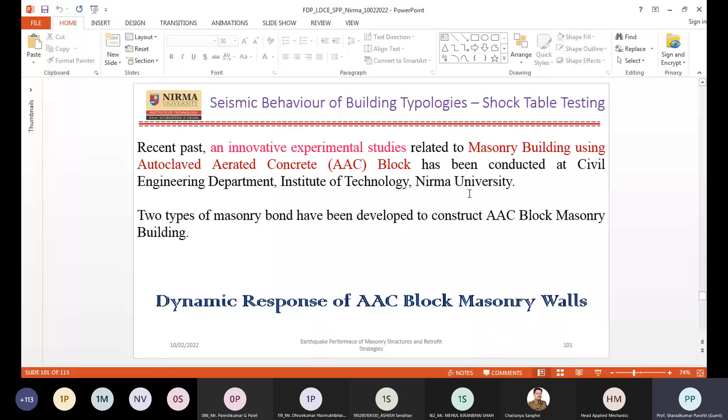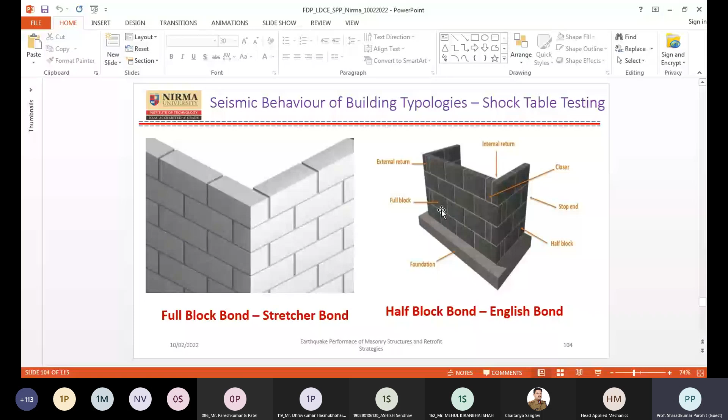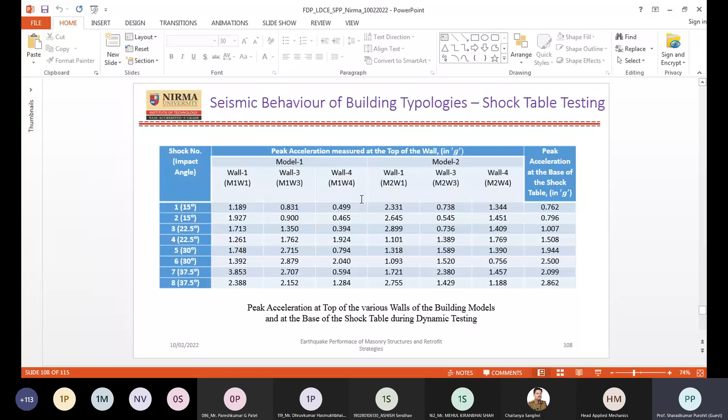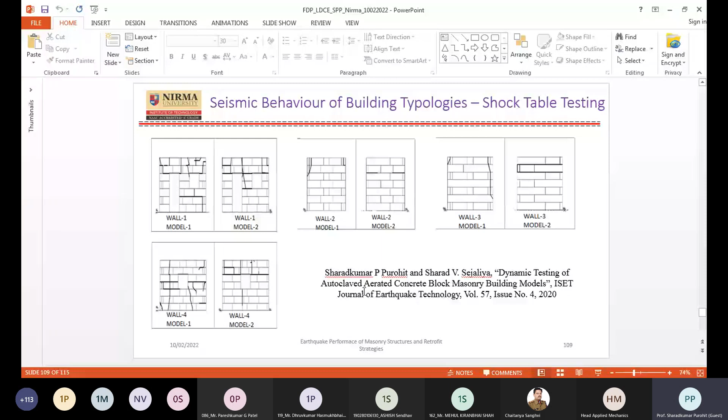our shock table. But the most important outcome is that obviously the AAC block reduced the weight by half as compared to red clay brick, but most importantly, stretcher bond performed relatively better as compared to English bond. And the major failure is out-of-plane bending because of the flexure of the long wall. But the AAC block building model is behaving at par with the red clay brick based building model, which we have all tested earlier.

And obviously, it will reduce the seismic hazard because of the reduction in weight as well as the acceleration. And some of the challenges that we nowadays face for masonry structures is the cost of the masonry unit because of decreased manufacturing units. We have rapidly decreasing construction of masonry structures, except some iconic structures, or where we want to preserve and retain our history, historical monuments. Only for that purpose we might develop or restore, or an effort by an individual. Otherwise, we have a lot of negligence towards masonry structures.

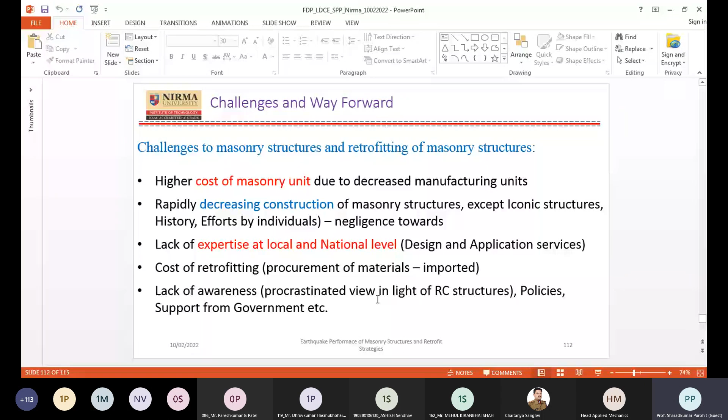Of course, as far as retrofitting is concerned, we have a lack of expertise at local and national level in terms of design and application. And the cost of retrofitting is also higher because most of the retrofitting material we procure from outside, it has been imported, and therefore they become expensive and not cost effective. And obviously the lack of awareness, mostly we are preoccupied with RC structures. We don't want to construct masonry structures, and we don't want to live in a masonry structure. And obviously the lack of policies and support from the government.